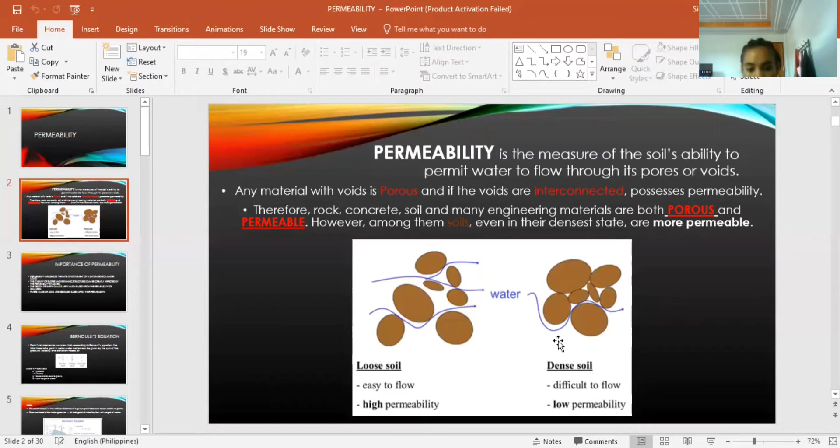Next is the importance of permeability. First, permeability influences the rate of settlement of a saturated soil under load. The stability of slopes and retaining structures can be greatly affected by the permeability involved. The structures we build are affected by the permeability of the materials used. The design of earth dams is very much based upon the permeability of the soil being used. Next, filters made of soil are designed based upon their permeability.

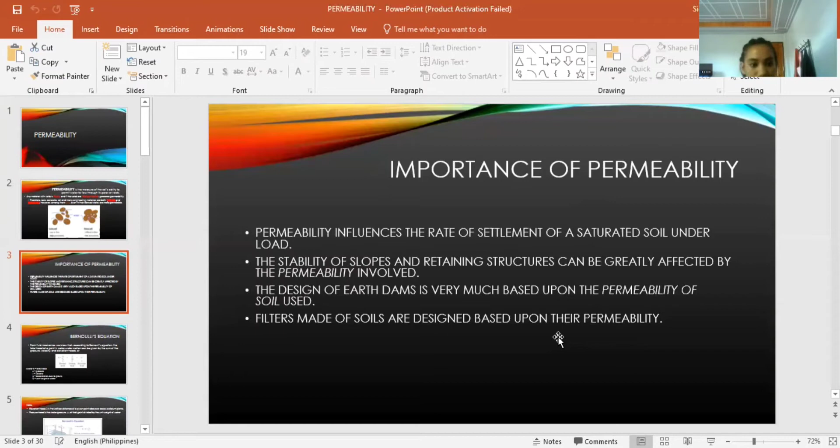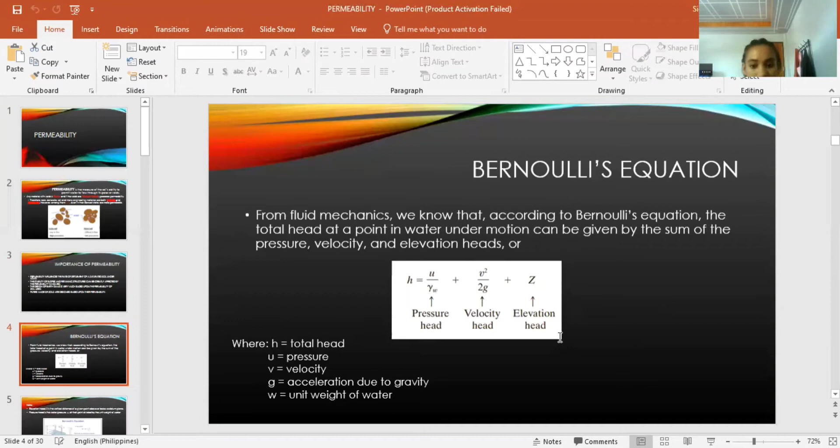Next is the Bernoulli's equation. From fluid mechanics, we know that according to Bernoulli's equation, the total head at a point in water under motion can be given by the sum of the pressure, velocity, and elevation head, or total head equals pressure head plus velocity squared over 2 multiplied by g, where g is the acceleration due to gravity, plus z, which is the elevation head.

Next, the elevation head z is the vertical distance of a given point above or below a datum plane. Pressure head is the water pressure U at the point divided by the unit weight of water. So we derive the formulas: at any point, H equals Z plus U over gamma W. For head loss between A and B, delta H equals HA minus HB, or it can also be derived as ZA plus UA over gamma W, minus ZB plus UB over gamma W.

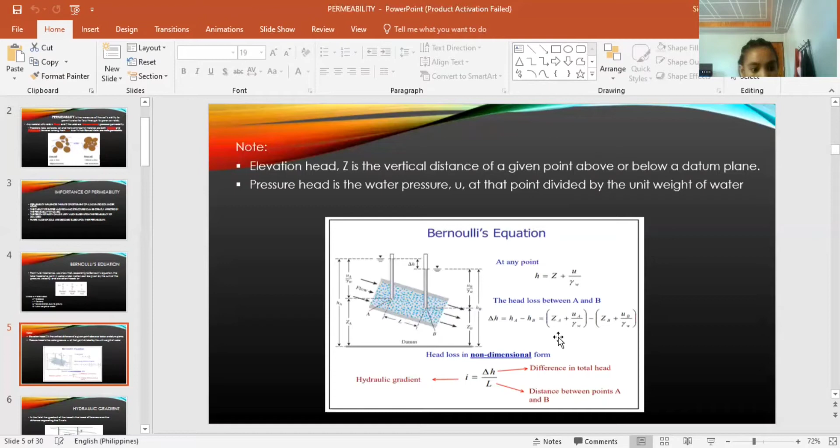That's the head loss between A and B. But for head loss in non-dimensional form, we use I equals delta H over L, where I is the hydraulic gradient, H is the difference in total head, and L is the distance between point A and point B. How do we derive I equals delta H over L? In the field, the gradient of the head is the head difference over the distance separating the two wells.

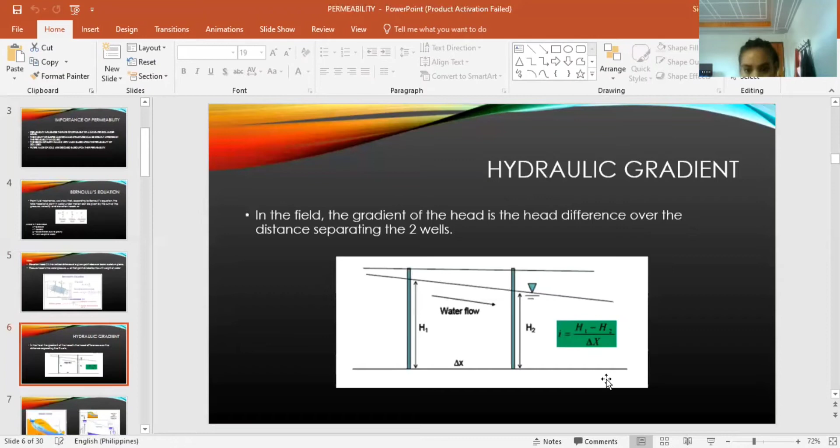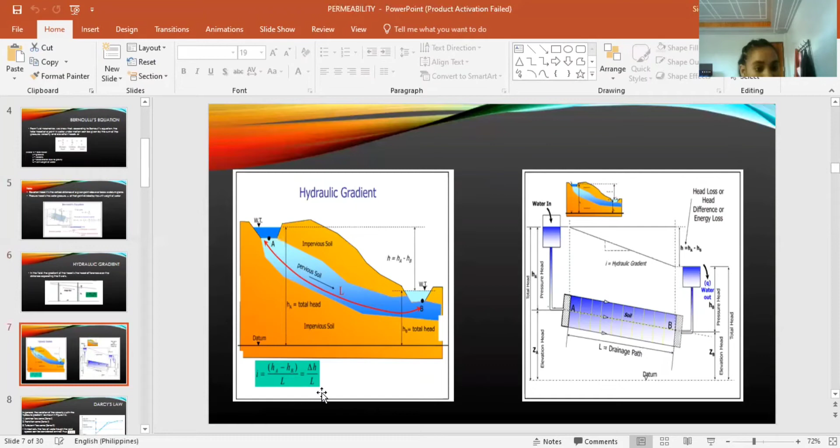So in finding I, we will use this formula: I equals H1 minus H2 over delta X. That's the hydraulic gradient, which gives us what I mentioned earlier. So we have I equals HA minus HB over L, or it can be derived as I equals delta H over L.

Next is the Darcy's law. In general, the variation of velocity V with the hydraulic gradient I is shown in Figure 7.2. Here's our figure: the laminar flow zone is zone 1, from here to this point. The transition zone is zone 2, here. The turbulent flow zone is here. The upward sloping line is our velocity V, and this is the hydraulic gradient I.

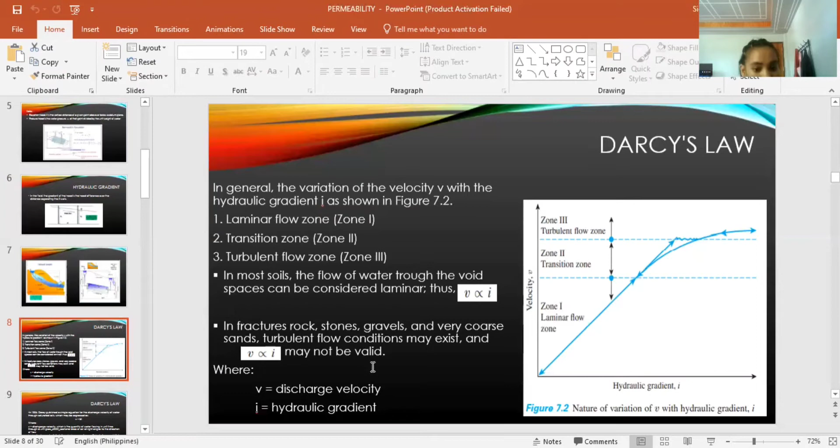In most soils, the flow of water through the void space can be considered laminar. Thus, discharge velocity is proportional to hydraulic gradient. In fractured rocks, stones, gravel, and very coarse sand, turbulent flow conditions may exist, and V proportional to I may not be valid. So there is a condition where turbulent flow may exist but it's not valid. Next is the Darcy's law.

Darcy's law. In 1856, Darcy published a simple equation for the discharge velocity of water through saturated soil, which may be expressed as V equals Ki, where V is the discharge velocity, which is the quantity of water flow in unit time, through a unit cross-sectional area.

K is the hydraulic conductivity, otherwise known as coefficient of permeability. And I is the hydraulic gradient, which is equal to H over L.

The quantity of water flowing through the soil per unit time is discharge, Q. It is equal to V multiplied by A, which is equal to K multiplied by H over L, multiplied by A.

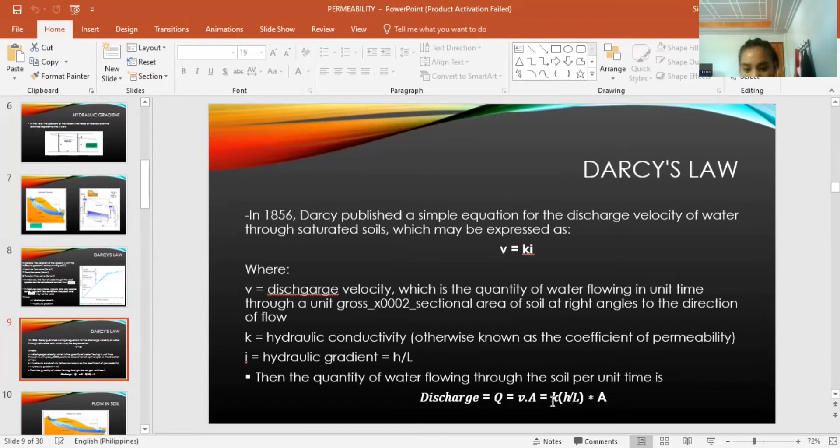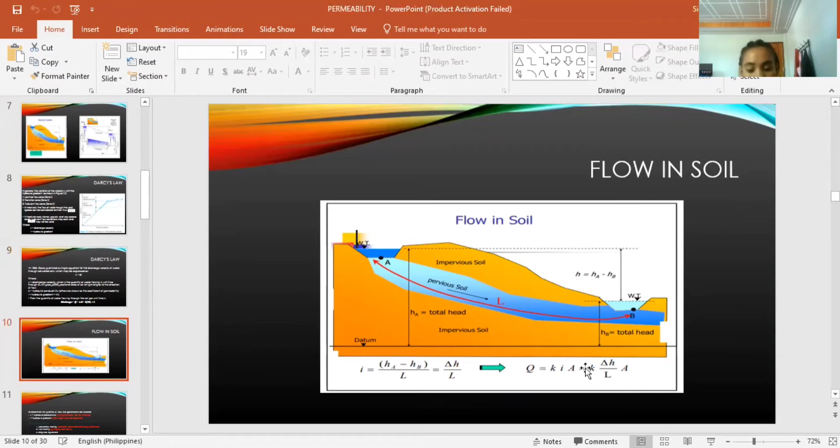So in finding Q, it is equal to KIA. Our I can be replaced, so it becomes K delta H over L multiplied by A.

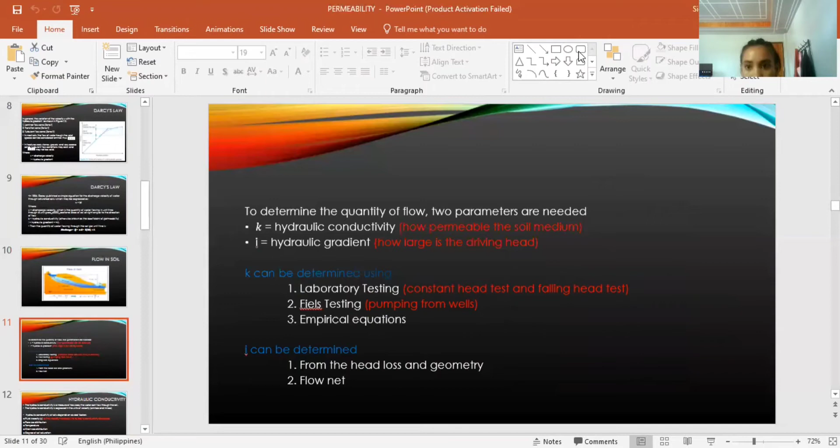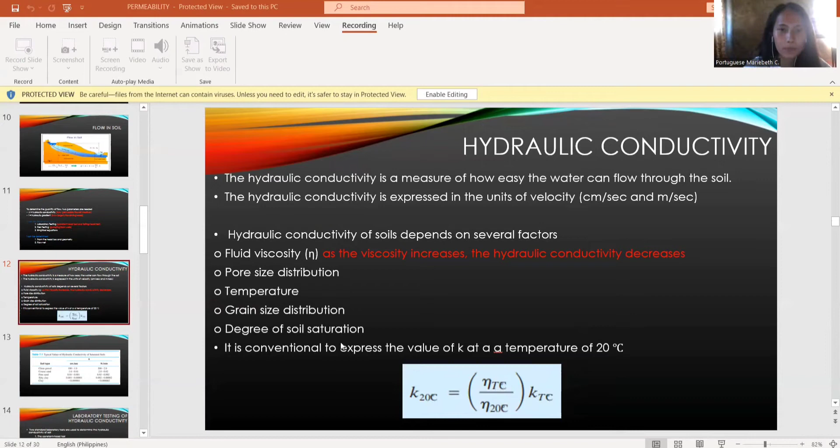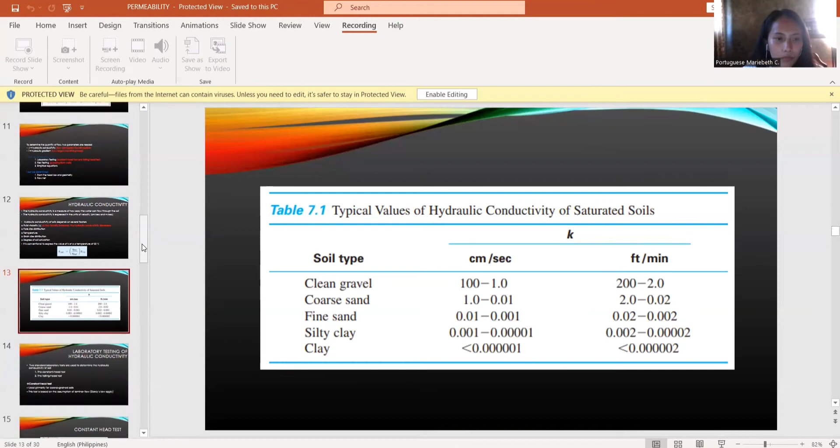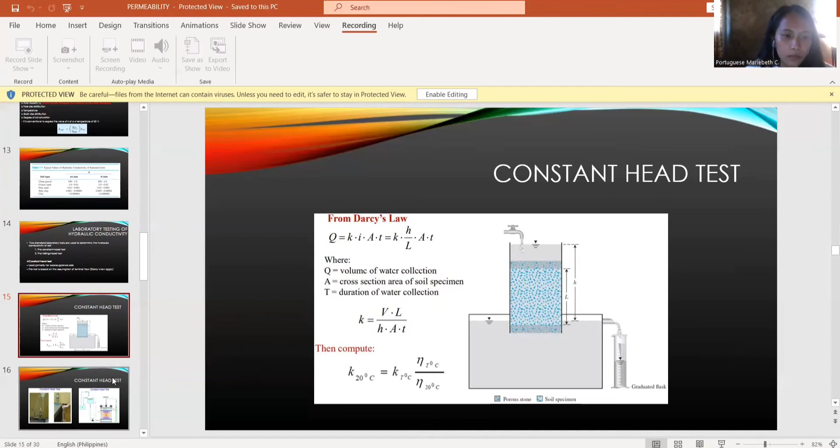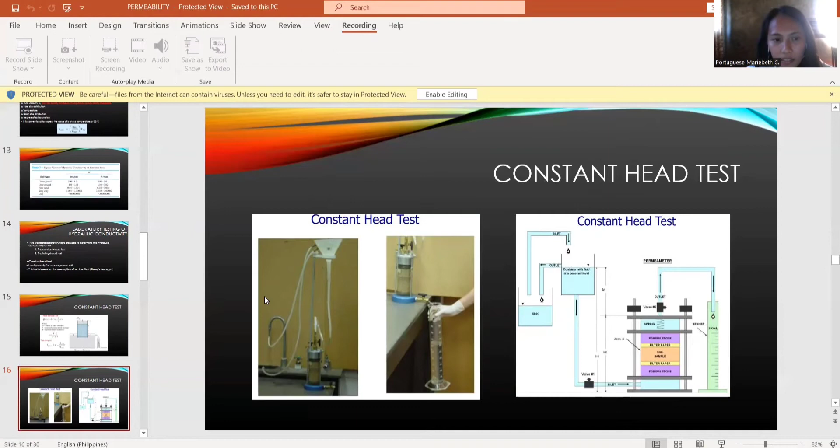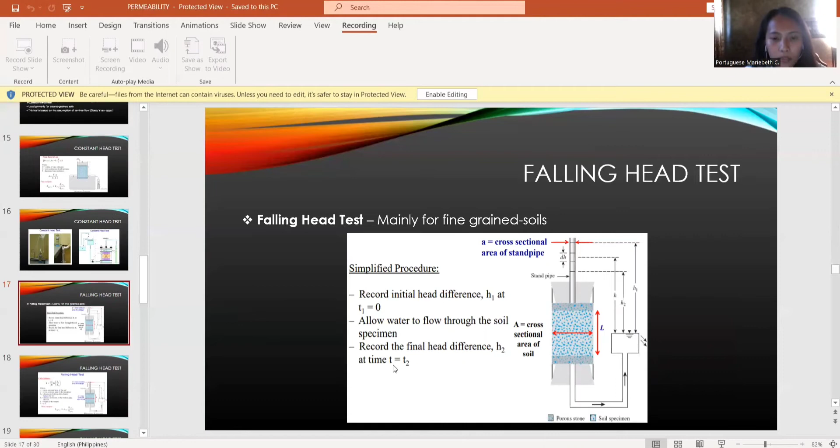So we have the calculations here: K is equal to aL all over AT, multiplied by ln of H1 all over H2, where A is equal to the cross-sectional area of the soil, and small a is the cross-sectional area of the standpipe.

H1 is the distance to the bottom of the beaker before the test, and H2 is the distance to the bottom of the beaker after the test. H1 is before, H2 is after the test. L is the length of the sample. This equals T1, T2 minus T1.

Then let's compute this: K sub 20 degrees Celsius is equal to K at T degrees Celsius multiplied by viscosity at room temperature, all over viscosity at 20 degrees Celsius.

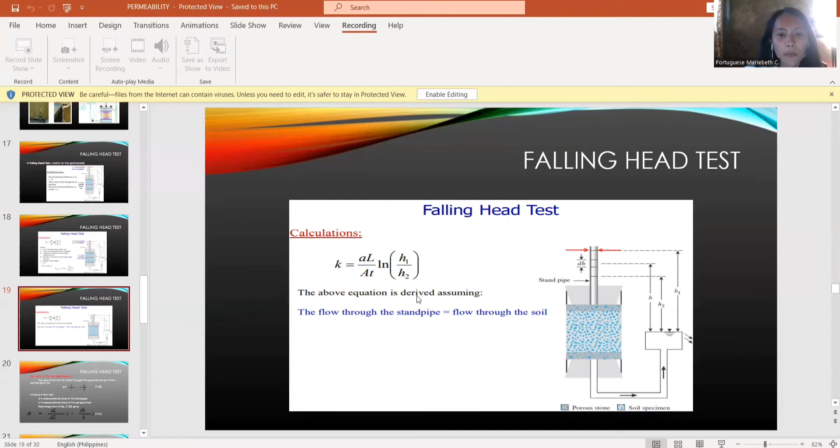So we have this one: K is equal to aL all over AT, multiplied by ln of H1 all over H2. The above equation is derived assuming the flow through the standpipe is equal to the flow through the soil.

Derivation of the falling head equation. The rate of flow of water through the specimen at any time is given by Q equals K multiplied by H all over L, multiplied by A, which is equal to negative a multiplied by dH over dt. This will be our equation 7.20, where Q is our flow rate, a is the cross-sectional area of the standpipe, and A is the cross-sectional area of the soil specimen.

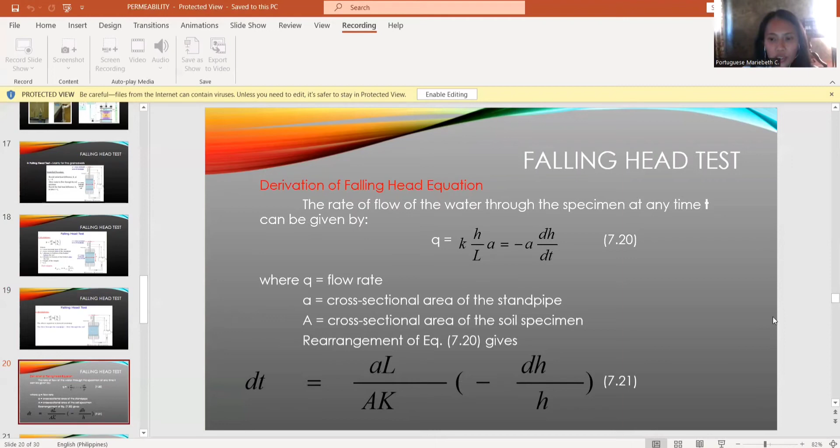Let's rearrange this one: dt is equal to aL all over AK, multiplied by negative dH over H. That will be our equation 7.21.

Okay, let's go over the continuation of the derivation of the falling head test. For the integration of the left side of equation 7.21, with the limits of time from 0 to t, and the right side with the limits of head difference from H1 to H2, that gives us t equals a multiplied by L all over A multiplied by K, wherein K is the hydraulic conductivity, multiplied by the natural logarithm of H1 over H2. So that is the equation.

So let's go to the next slide.

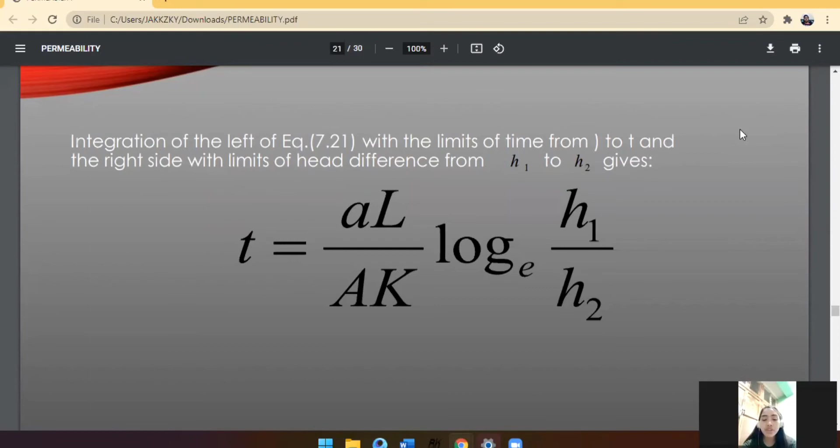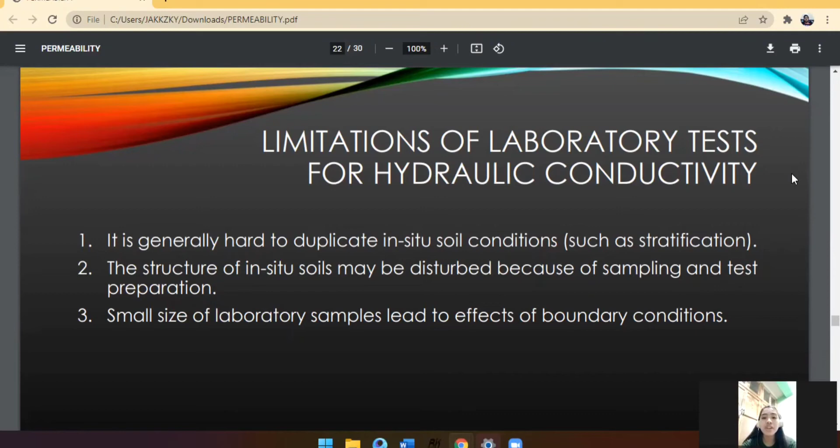So we have here the limitations of laboratory tests for hydraulic conductivity. First, it is generally hard to duplicate in situ soil conditions such as the stratification. Second, the structures of the in situ soils may be disturbed because of sampling and test preparation. Third, the small size of laboratory samples leads to boundary condition effects. These are the three limitations of laboratory tests for hydraulic conductivity.

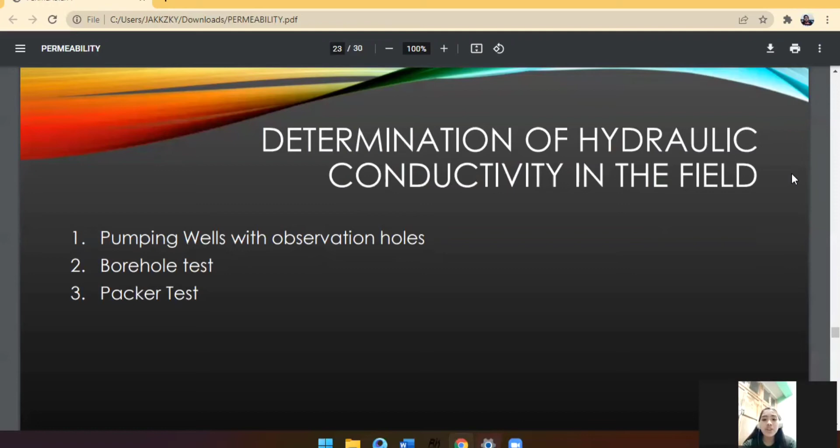So we have here the permeability test using pumping wells. This is used to determine the hydraulic conductivity of soil in the field. Hydraulic conductivity measures how easily water can pass through soil or rock. During the test, water is pumped out at a constant rate from a test well that has a perforated casing. Several observation wells at various radial distances are made around the test well. Continuous observation of the water level in the test well and the observation wells is made after the start of pumping, until steady state is reached. The steady state is established when the water level in the test and observation wells becomes constant.

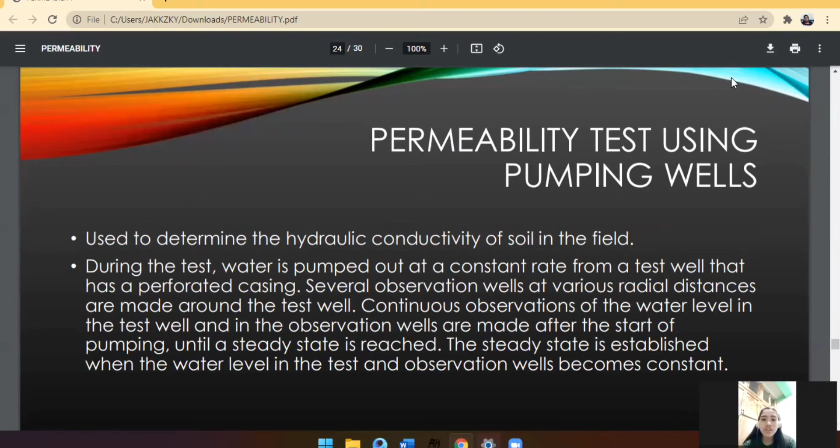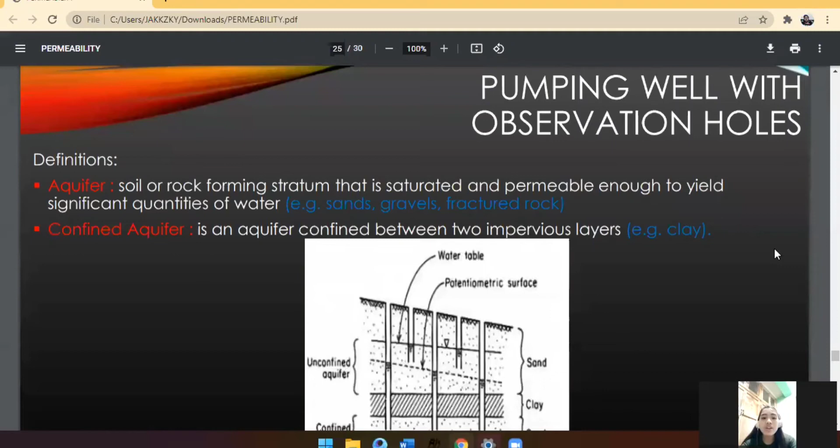So on this part, we have the pumping well with observation holes. The aquifer is a soil or rock forming stratum that is saturated and permeable enough to yield water. That is what makes it saturated soil or rock for the aquifer. For the confined aquifer, this is an aquifer confined between two impervious layers, for example clay. For the unconfined aquifer, examples are sands, gravels, and fractured rock.

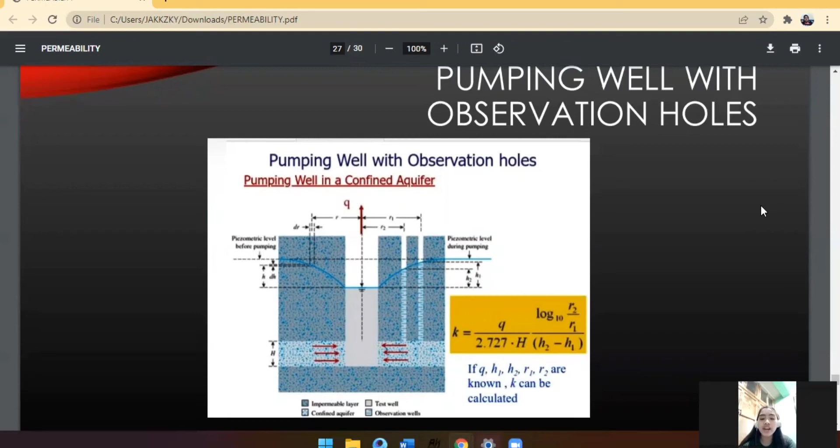For the test well, that is the gray one in the middle. For the observation wells, that is the zigzag pattern, the one with the part on the right side. That is the impermeable layer, confined aquifer for the test well and observation wells.

So the equation we are going to use is K equals Q multiplied by logarithmic base 10 of R sub 2 over R sub 1, divided by 2.727 multiplied by H times H sub 2 minus H sub 1.

Then if Q, H sub 1, H sub 2, R sub 1 and R sub 2 are known, then K can be calculated. So that's it for the confined aquifer.